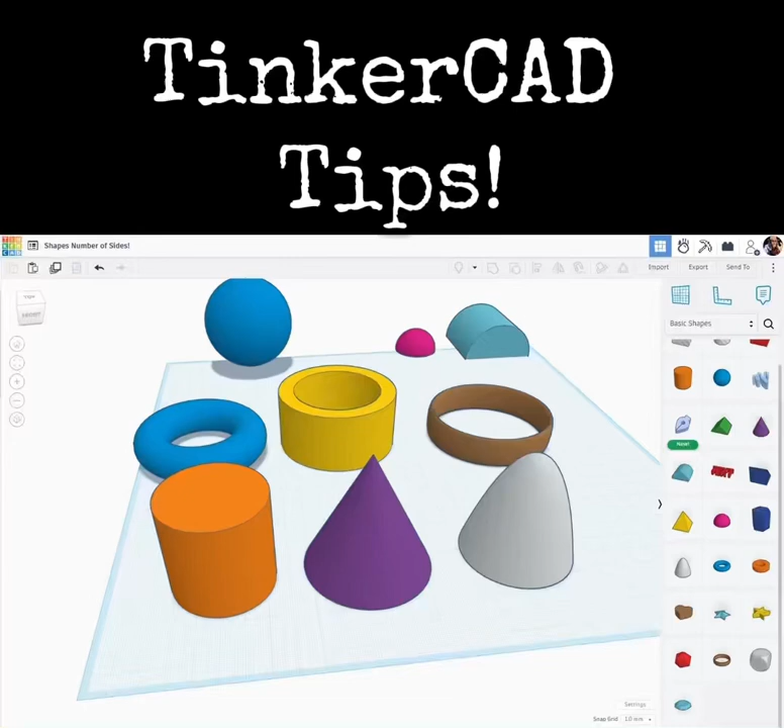Many of you know who work with TinkerCAD a lot that it does have some limitations. For instance, within the meshes that make up all the objects in a project, there's a maximum of 300,000 triangles. Certain rounded shapes will use up more of those triangles than square shapes, like a cube.

What they've done recently is increased the number of sides so we can make things look rounder. Here's an example, the cylinder, from the basic shapes over here on the right. It used to be that cylinders could only max out at 64 sides.

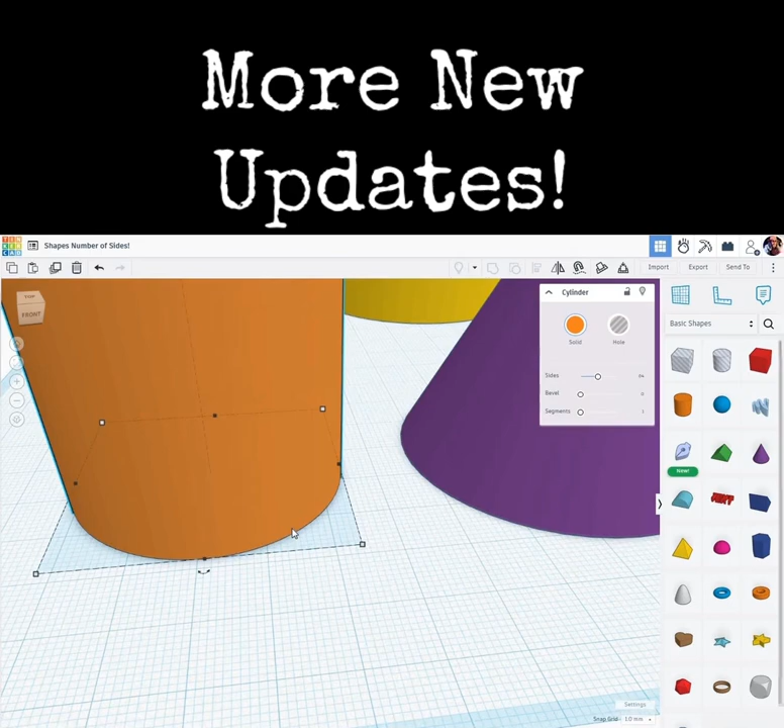If we change this to 64 and zoom in real close, you could begin to see the flat sides on the object. Well, what they've done recently is doubled that up. We can now go to 128 sides and make it look almost perfectly round. In fact, when you go to print something like this, you won't see any of those flats at all.

Another example is the cone here. It comes in at 48, used to have a maximum of 64. We'll now go to 128, so it looks nice and smooth.

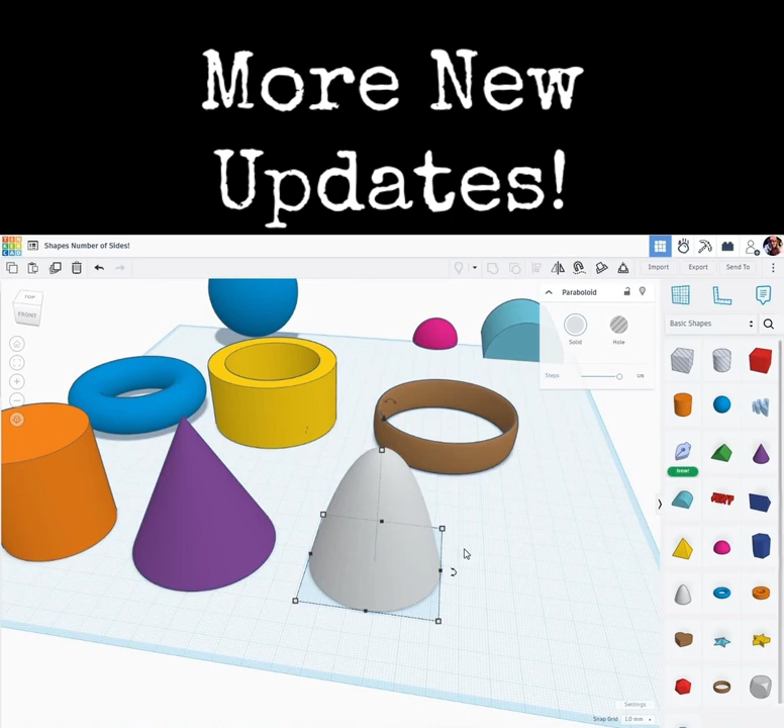Same with this paraboloid here. The default is 48, but we can go up to 128 so it looks nice and smooth. That's another one they've updated.

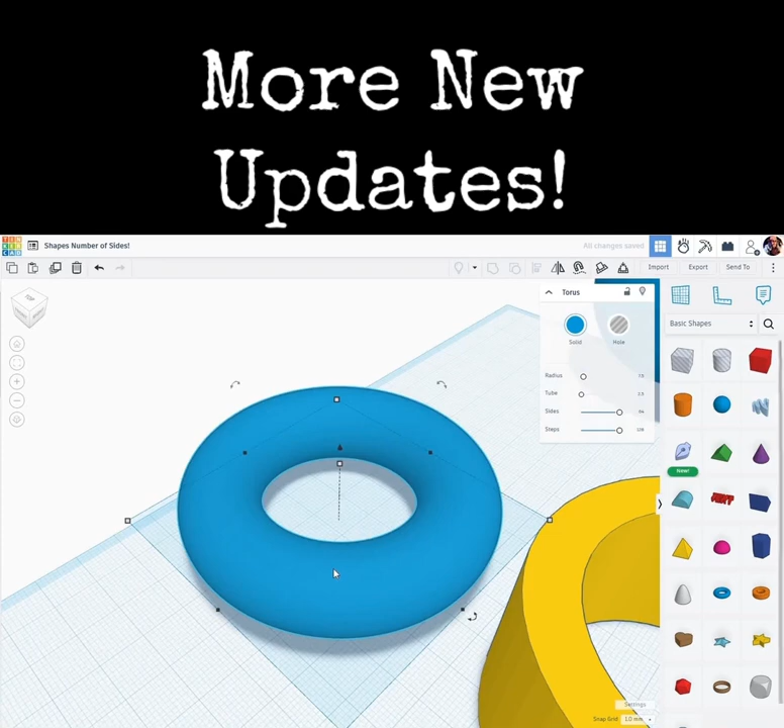Over here we have the torus. Same thing—this one has two different measurements you can increase, sides and steps. There used to be a limitation of 64 on the number of steps, but now we can max that out to 64 sides and 128 steps, and look how smooth that looks now. When printed, you won't be able to see that it's flat-sided at all.

Here's another one, this tube. The number of sides comes in at 48, but we can increase that now to 128.

Here's one that doesn't get used often but has its purposes, the ring. This one also comes in at 48, but you can increase it to 128. Now this one's a little special in that you can make changes to the shape, stretch things out, etc.

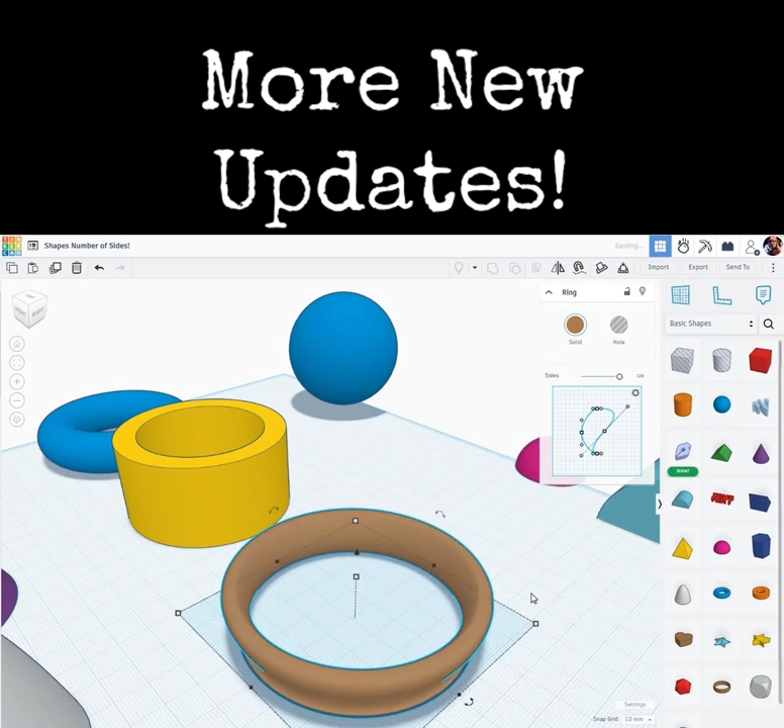Now a couple that haven't appeared to change recently would be, for instance, the sphere. It has 3 dimensions that have flat sides essentially. All we have for the sphere is number of steps, and this one still maxes out at 64. Who knows, maybe they'll change that in the near future.

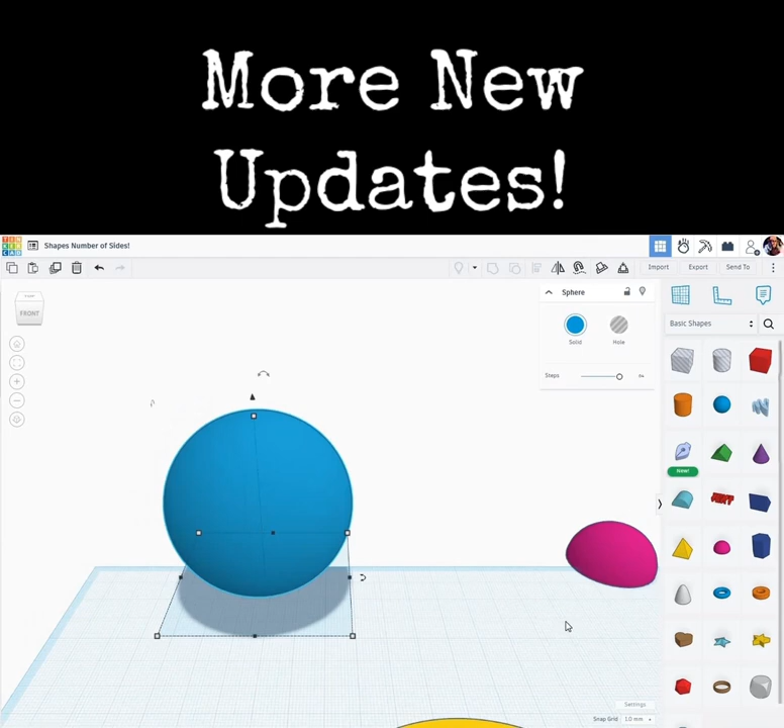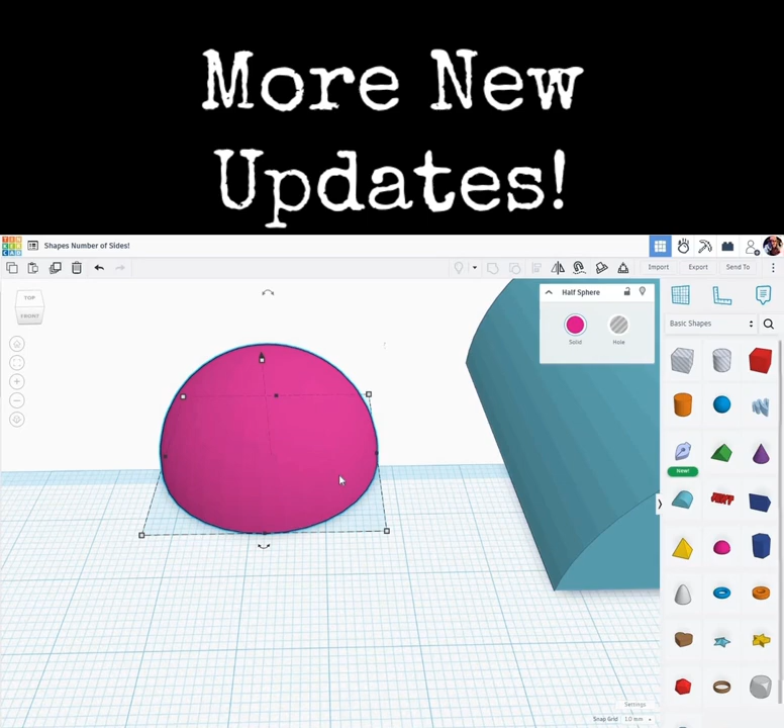Now there's a couple of basic shapes that do have rounded sides but for whatever reason don't have any parameter where you can increase that. Here's the half sphere, for example—you'll see under the dialog there's no settings for sides or steps. If you really wanted something like this to be perfectly smooth, you could take a normal sphere, max out the sides, and split it in half to recreate this half sphere.

Another one is this rounded roof. You can kind of see the flat sides going on here, but again there's no setting for that. You could take a standard cylinder, increase the maximum number of sides, and split it in half.

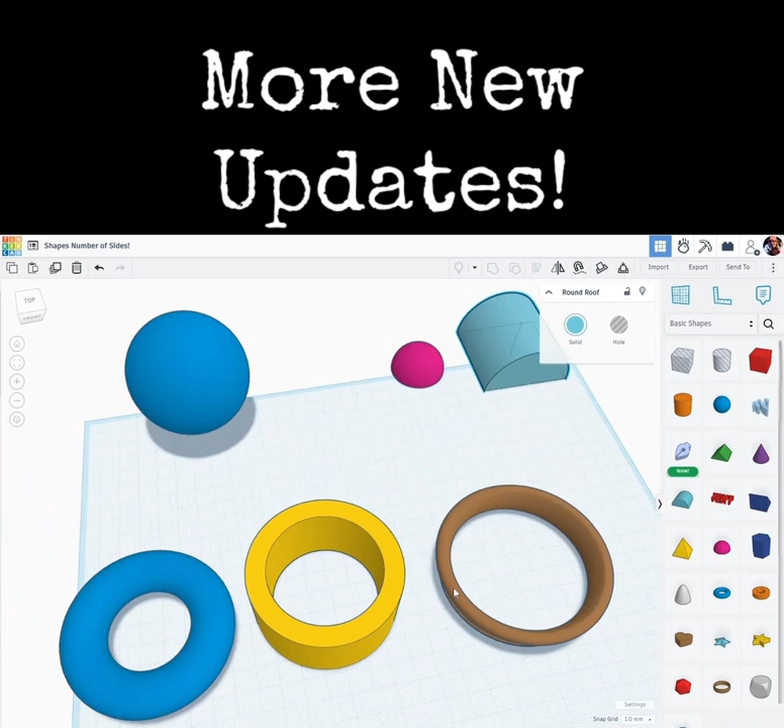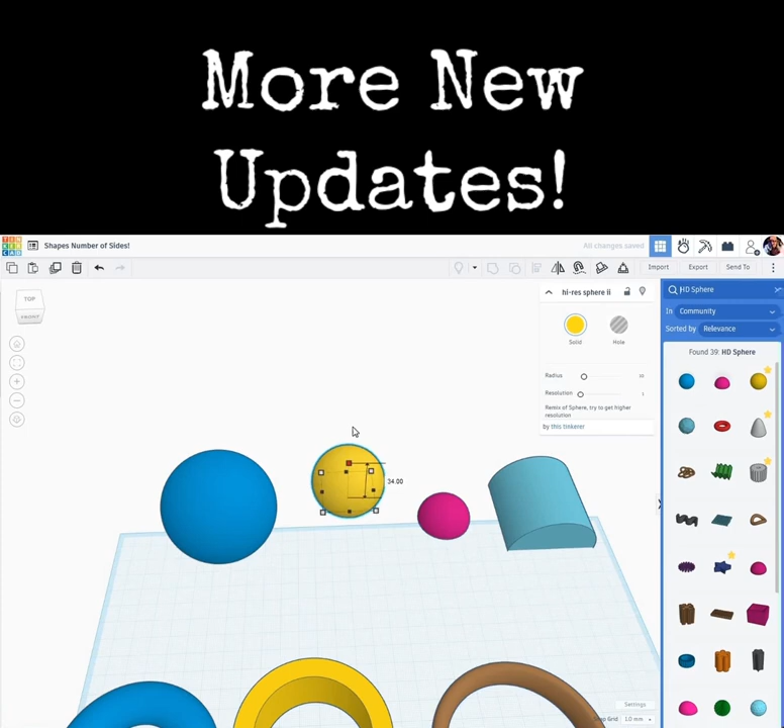Now, some of these shapes also have high-definition versions over in the shape generators. Let's take the sphere here, for instance. If we search, I believe there's one called HD Sphere—that's this yellow one here. We'll bring that out, and I'm going to Alt-Shift increase the size a bit. Notice this one has a setting called resolution. By increasing that, you can eliminate more of the flat sides of this.

So, there's an update. Got to thank the good folks over at Tinkercad Autodesk.